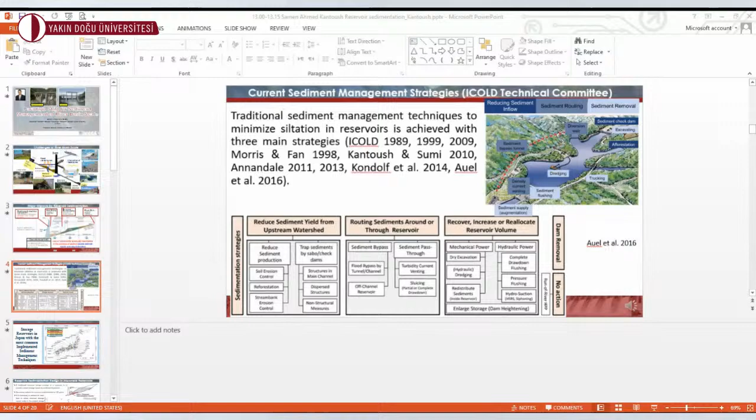We had some technical issues right now. Dr. Aliyu Ibrahim Polymeri, are you here? Hello, what did you say? Dr. Aliyu Ibrahim Polymeri, if you are ready, you can present now. Are you ready for your presentation? Okay, I am ready. Okay, doctor. You can present. Yes, I think we can see your presentation.

Hello, good day. My name is Aliyu Ibrahim. I'll be making a presentation on dairy wastewater treatment and resource recovery using electrochemical based techniques.

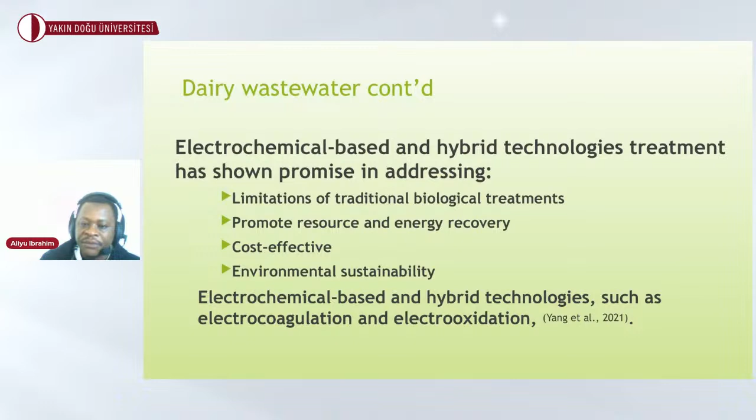So electrochemical-based methods tend to offer more to promote resource recovery. It is also cost-effective, that is, the price you spend on it is relatively cheaper. It's also environmental because usually they bring about a lesser amount of sludge. Most common processes in electrochemical-based methods include electrocoagulation, in which we produce coagulant in situ using current, and also electrooxidation, in which we produce radicals that degrade these organic components.

What are the sources of dairy wastewater? As I have said, the major source of this wastewater is dairy industries. This waste comes from heating and cooling processes, equipment cleaning, milk, product spillage, whey, and different things. Generally, the major source of this dairy wastewater is the industry, and a lot of processes happen in there. The wastewater composition varies depending on the product we are looking at.

We have different dairy products ranging from cheese, pasteurized milk, butter, ice cream. All of them have different levels of composition. Also, in addition to this, dairy wastewater could also contain cleaning agents, because whenever you carry out these things, you clean your processing plant. So you also see some of these components in the dairy wastewater. On average, it is speculated that about 2.5 to 10 liters of wastewater is generated per 1 liter of milk that is produced.

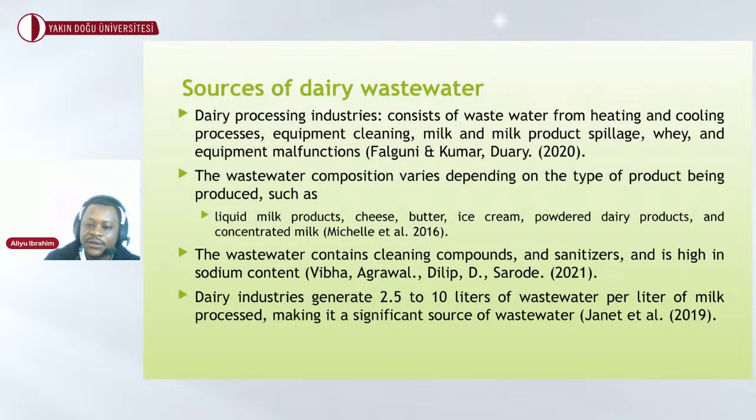Now, what do you have in this dairy wastewater? As I've said, dairy wastewater is highly heterogeneous and it varies. The composition of this dairy wastewater varies with the source and the location you're looking at. So the source, in terms of what type of water brings about this wastewater and where you are collecting it from, also affects the composition of this wastewater.

Now, a lot of indicators are used to determine how polluted the wastewater is. We use the COD, the chemical oxygen demand, and the biochemical oxygen demand to grade how polluted it is or what level of treatment has been achieved using a process to treat dairy wastewater.

Now, most often, other things that have also been looked at in dairy wastewater include nitrogenous waste, including nitrogen, total nitrogen, nitrate, ammonium, and phosphorus composition, including phosphorus and total phosphorus. All these have also been analyzed in dairy wastewater. We also have physical parameters in wastewater, including total dissolved solids, TDS, total solids, total suspended solids. All these parameters have been analyzed in dairy wastewater.

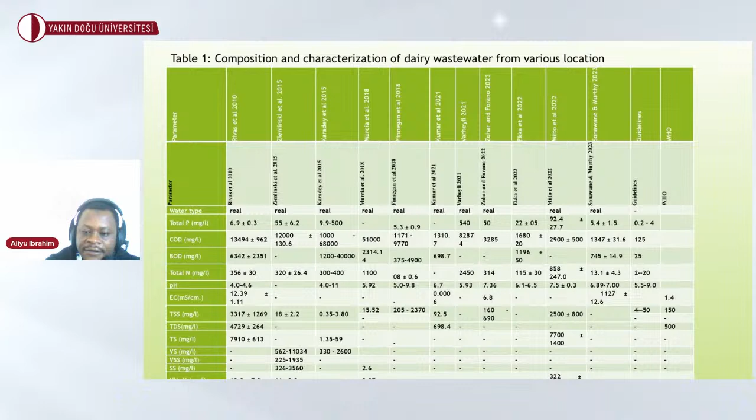So you can see, it depends on the method of processing in the industry. So it varies; high values and low values have been reported, and we have a lot of components here that have been determined in dairy wastewater, as mentioned above.

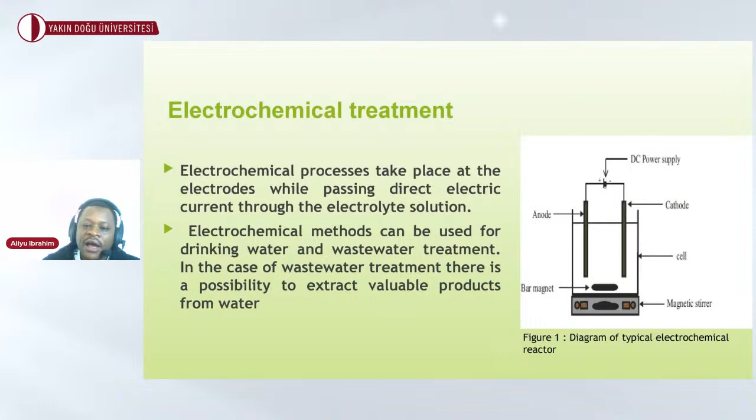Now, what is this electrochemical treatment method? What do they do? The principle is based on bringing about electro-degradation of the anode, if you're talking about electrocoagulation. But in other methods like electro-oxidation, we use current to create what we call a radical, which can further go on to break down these organic compounds.

Now, what are these electrochemical based methods? They are basically of three aspects. There is conversion, which is able to change your pollutant from one physical state to other properties, so you could change your material entirely. Then we have the separation method, in which it's able to separate your pollutant from your matrix. Then we have a combined method, which utilizes both the conversion and separation methods.

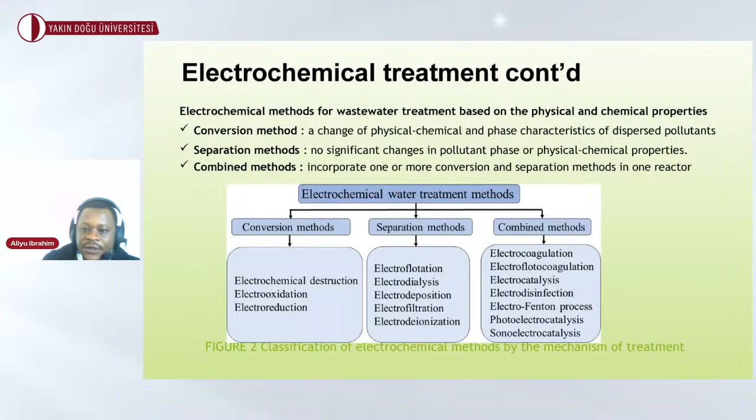Under the conversion method, we have electrochemical destruction, in which it destroys the pollutant entirely. We have electro-oxidation, in which the material is oxidized. We have electro-reduction, in which the oxidation state of the pollutant is reduced to a less toxic state. Then we have the separation method, with electrofiltration and other methods. I won't go into detail discussing these. Then we have the combined method, including electrocoagulation, electrocatalysis, and other methods.

Now, the factors that control the success of this treatment include what electrode type you are using, the distance between the electrodes, and what kind of arrangement you are adopting. The pH of the wastewater also determines the success of the treatment. How long are you treating your material? What's the temperature? All these factors affect the performance you get after the treatment.

Now, what are the advantages of this method? They are energy efficient because they are able to give you energy you can recover. You can treat quite a wide range of pollutants using this method. They are selective; you can design this method differently. We can also recover valuable resources using this method.

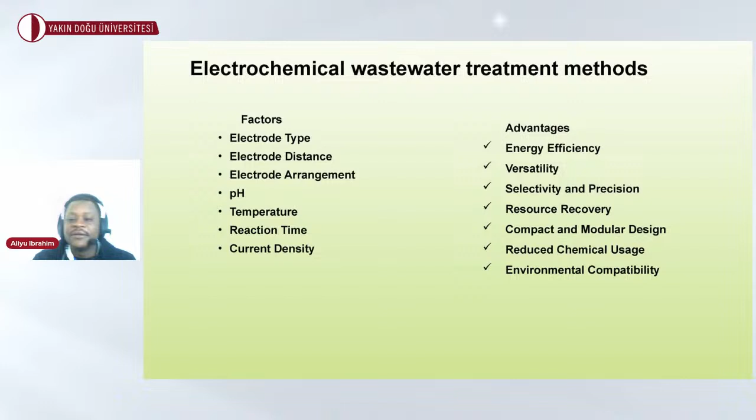They are simple, with simple instrumentation. They also reduce the use of chemicals, that is, they're environmentally compatible. That is, you don't have quite a range of chemicals used that will impact the environment.

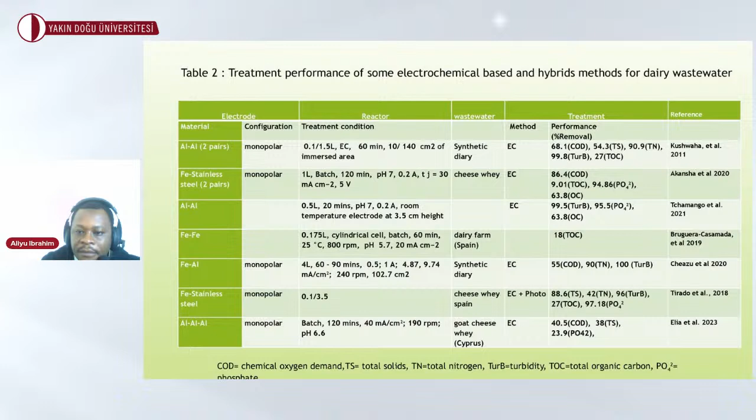Another research here, you can see these materials and analyses from quite a number of different locations. The last row gives the water that was analyzed. This is the only paper reporting the treatment of dairy wastewater in Cyprus. They used electrocoagulation to treat wastewater from goat cheese whey, and they achieved about 40.5% COD removal, 38% total solid, and 23.9% phosphate. This research was carried out in 2023, so it's quite recent. That means there's still a lot of work to be carried out, because we didn't find any data reported for North Cyprus.

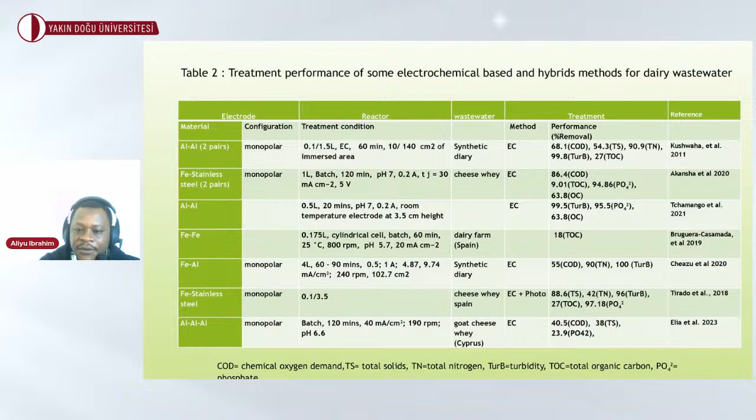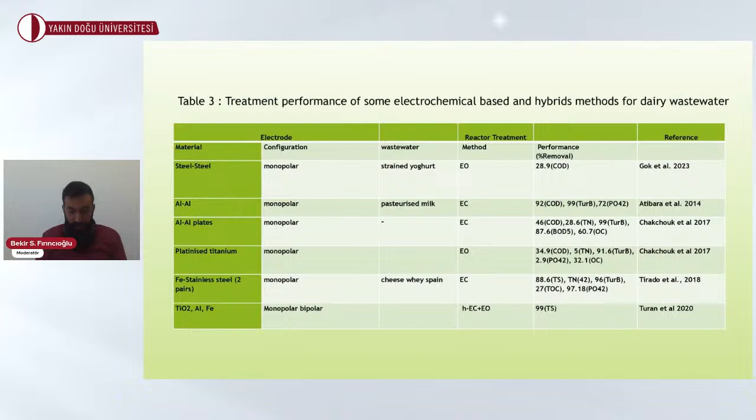Dr. Aliyu Ibrahim, I think you have some connection issue. It was perfectly all right. We were listening to you, but for the last 5 seconds, it froze. Can you hear me? Are you there? You can also use the private chat. Okay, I think we are having a connection issue with Dr. Aliyu Ibrahim. If he is available within the next minutes, he will be able to continue his presentation. Right now, Dr. Shifa Doğan has a presentation, so let her present.

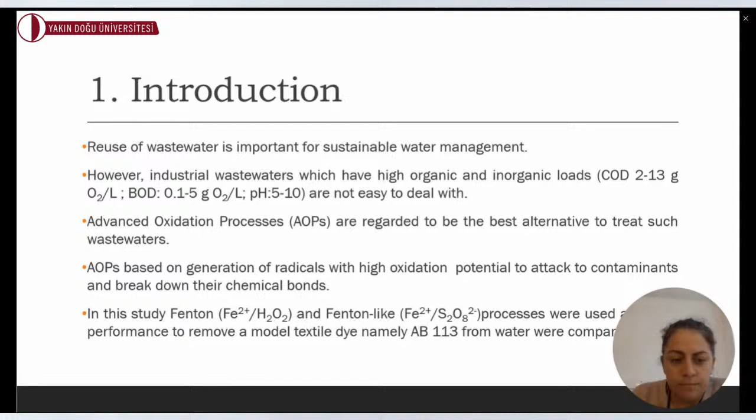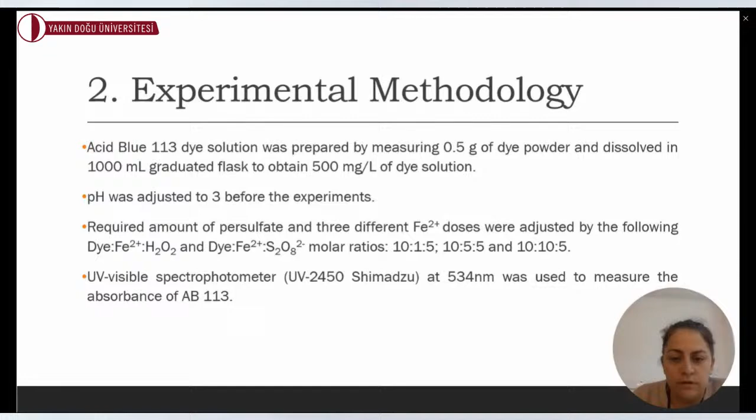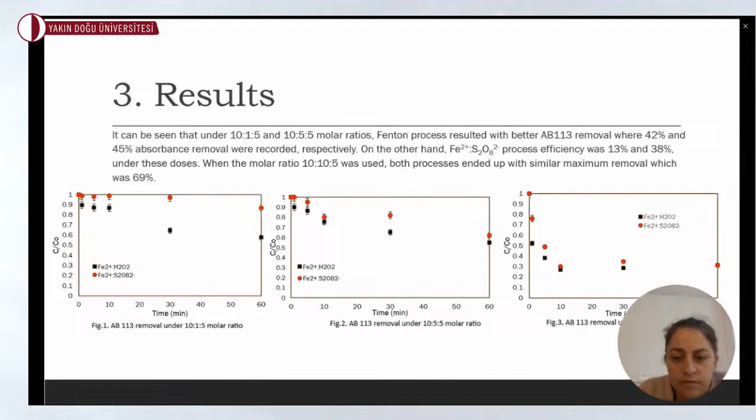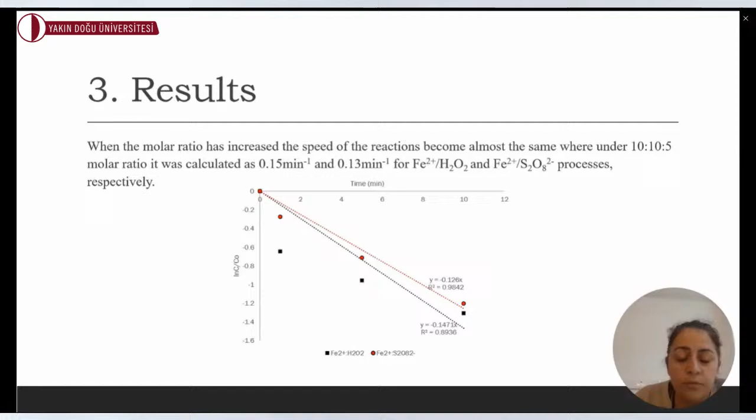So this is Dr. Shifa Doğan's presentation. Hello everyone, I'm going to present a comparative study of Fenton and Fenton-like reactions for the removal of AB113 from waters. My presentation contains... I think we have a problem with the voice. We will try to take it from the beginning. Sorry to Dr. Shifa Doğan for this.

Hello everyone, I am going to present a comparative study of Fenton and Fenton-like reactions for the removal of AB113 from waters. My presentation contains introduction, materials, methods, results and conclusion. Reuse of water is important nowadays, especially for sustainable water management. However, industrial wastewaters have high organic and inorganic loads, which are not easy to treat, such as COD ranging from 2 to 13 grams oxygen per liter, as well as BOD and high and various pH conditions.

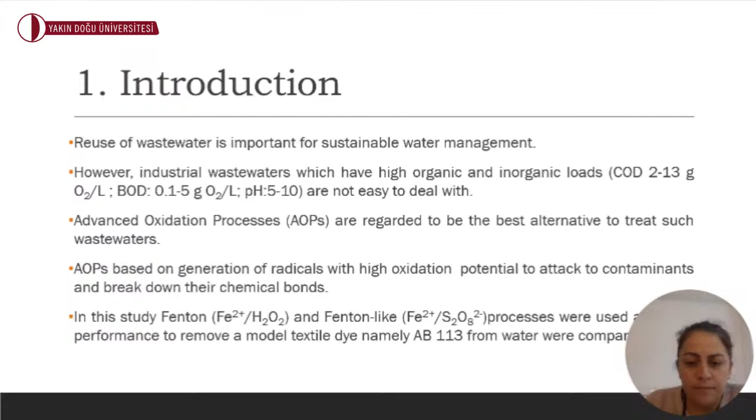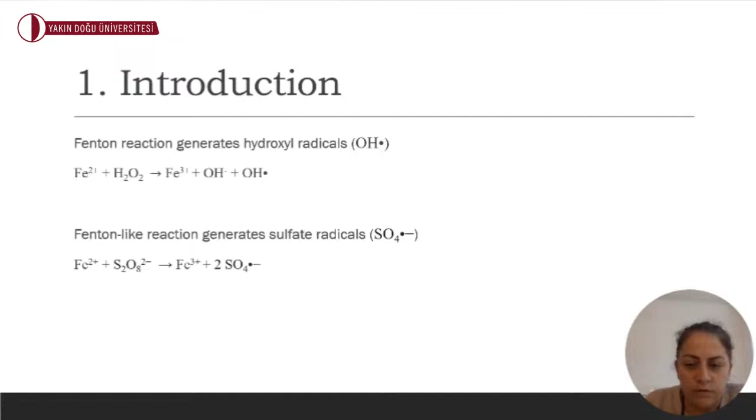The Fenton reaction is based on generation of hydroxyl radical, as you can see from the reaction pathway. Iron oxidizes hydrogen peroxide, hydrogen peroxide turns into hydroxyl radicals, and iron is oxidized. In the Fenton-like reaction, where we use persulfate, iron oxidizes and persulfate turns into sulfate radicals. So in summary, in this study we compare the efficiency of hydroxyl radicals and sulfate radicals to remove the model pollutant.

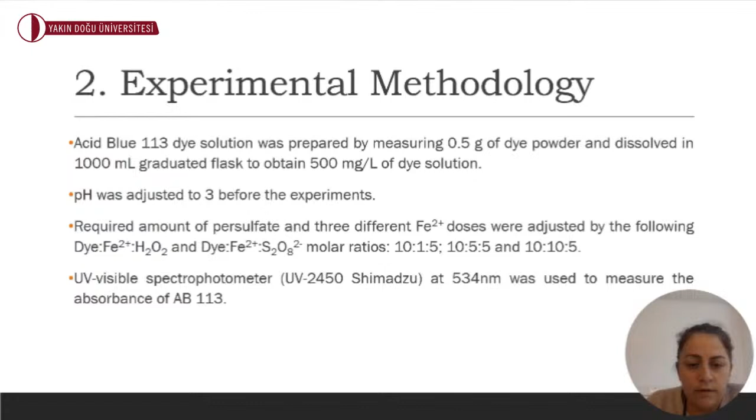In this study, 500 milligrams per liter dye concentration was used, and the pH was adjusted to 3 before all the experiments, because Fenton reactions work best in acidic conditions. The dye:iron:hydrogen peroxide or dye:iron:persulfate molar ratios were 10-1-5, 10-5-5, and 10-10-5; these are the most studied ratios in the literature, and we chose to start with them. The absorbance removal was recorded by UV-visible spectrophotometer at 534 nanometers.

In the results, we observed that under low molar ratios, the Fenton reactions gave better results, and 42% and 45% absorbance removal were recorded under 10-1-5 and 10-5-5 molar ratios with Fenton. On the other hand, the Fenton-like reaction resulted in lower absorbance removal, which was 13% and 38% respectively.

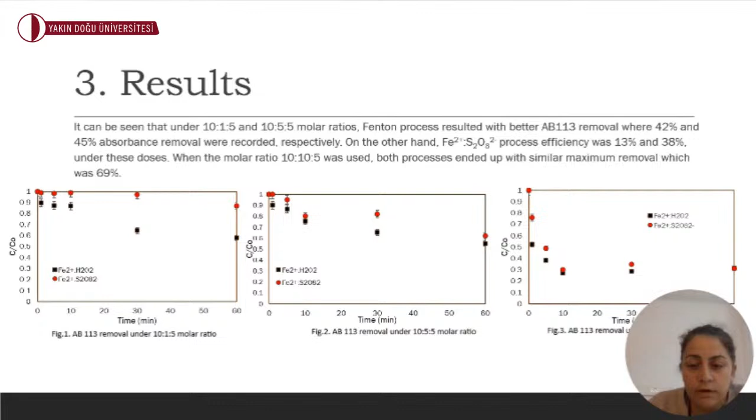In contrast, when the dose was increased to 10-10-5, the Fenton and Fenton-like reactions became comparable, and a similar removal percentage after 60-minute treatment was observed, which was 69%. And the degradation curves follow first-order kinetics, and it enables us to do some

The observed removal rate constants enable us to compare the performances of the two reactions. And here we can see that the Fenton reaction is much faster than the Fenton-like reaction, found to be 5 times faster. The observed reaction rate constant was 0.01 per minute for the Fenton reaction, and on the other hand, for the Fenton-like

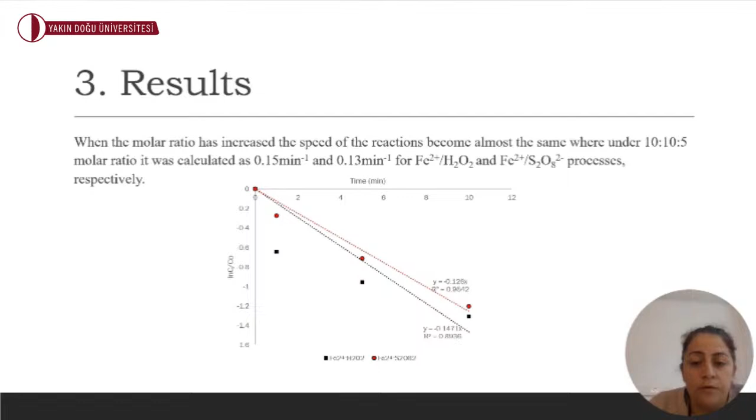reaction, it was 0.002. And for the higher dose, as the removal percentage became similar, the removal rate also became similar. We can see this in the observed reaction rate constants, which were close to each other, 0.15 and 0.13 per minute for the Fenton and Fenton-like reactions, respectively.

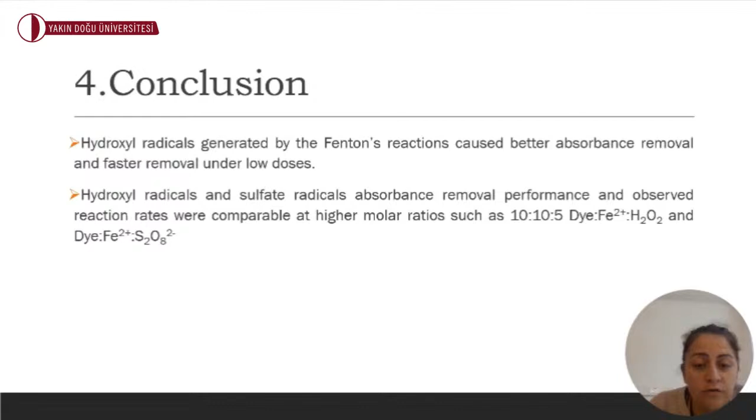In summary, for the conclusion of this research, hydroxyl radicals generated by Fenton's reaction cause better absorbance removal and faster removal for the lower doses we have tested in the scope of this study. And when the molar ratio increased to 10-10-5, the performance of hydroxyl radicals and sulfate radicals to remove AB113 was comparable, and the reaction rates were comparable too.

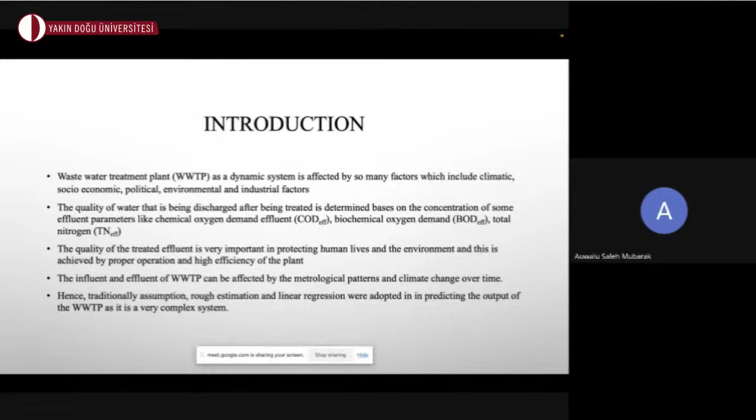So traditionally, assumptions and rough estimation, along with the statistical method of linear regression, were adopted in the prediction of these outputs in wastewater treatment plants. So the aim of the study is to predict the chemical oxygen demand in the new Nicosia wastewater treatment plant by achieving the following objectives.

One, we need to have data selection, and we need to process the data in such a way that it will give good performance or good features to the model when training. We also need to choose the machine learning models that we want to use in the prediction of the COD. And we will explain how the models make decisions using the SHAP explainer.

So artificial intelligence is like mimicking human intelligence, using statistics, algorithms, and so on. Under artificial intelligence, we have machine learning and deep learning, and also a new study area, explainable AI, which gives humans trust in how the models make decisions and which parameters contributed a lot to the prediction or decision making of that particular model.

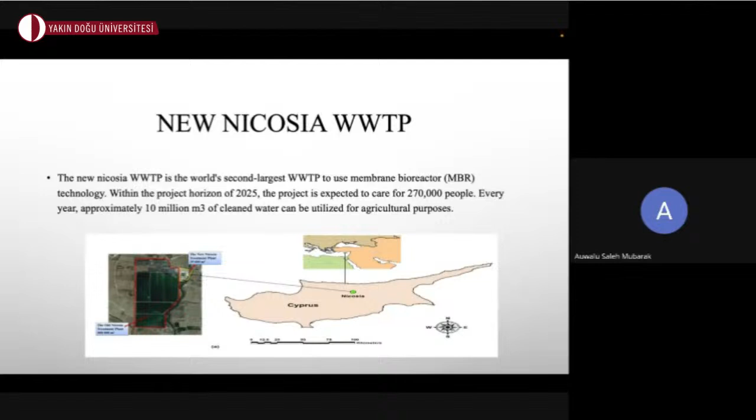So the new Nicosia wastewater treatment plant is a bicommunal wastewater treatment plant. The project horizon is up to 2025 and it is expected to take care of 270,000 people. And it will be discharging 10 million cubic meters of clean water that can be utilized for agricultural purposes.

So for the data set we are going to use, one is from the wastewater treatment plant, which we label as C1, and also the temperature data from NASA, which is the meteorological data. This data will be split into 75% for training, and the remaining 25% will be used for validation. The input and output data will be normalized into a range of 0 and 1.

So the models that we chose to use in this study are ensemble models, which are gradient boosting, categorical boosting, and random forest. These models are based on decision trees and random forest, so they are good ensemble models.

So in the methodology, we have the data pre-processing, which is the normalization to make the values in the range of zeros and ones. Then the training using the Nicosia wastewater treatment plant data, which we label as C1. The training using the meteorological data, which we label as C2. And then the training using the hybrid data, which is C1 and C2. Then the model explanation uses the Shapley additive explanations, which is SHAP.

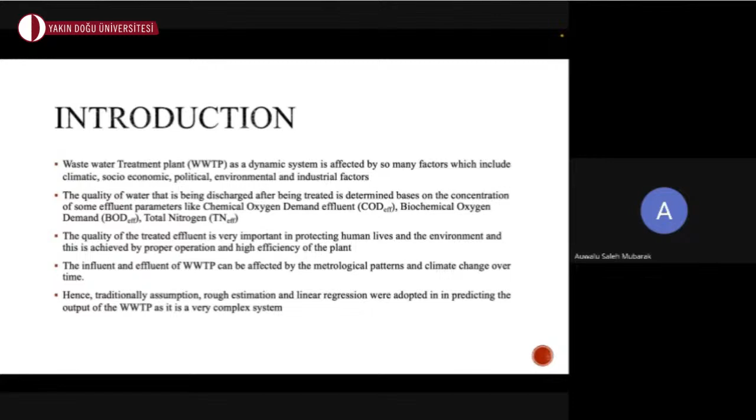So in this study, we'll try to use artificial intelligence or machine learning models, unlike previously when traditional assumptions, rough estimations, or classical models such as linear regression were adopted. So the aim of the study is to predict the biochemical oxygen demand in the new Nicosia wastewater treatment plant. We are going to achieve this aim by good selection of the parameters or variables from the data, the selection of the machine learning models, and also improving the performance of the models by applying an ensemble technique.

So we all know that artificial intelligence is all about mimicking human intelligence. So we are going to employ these models to see how they take in the data and make predictions of this particular biochemical oxygen demand. The new Nicosia wastewater treatment plant, located in Cyprus, is one of the largest in the world, and it uses a membrane bioreactor, which is a good technology for wastewater treatment. The plant is expected to provide the island with clean water and also water that will be used for agricultural purposes.

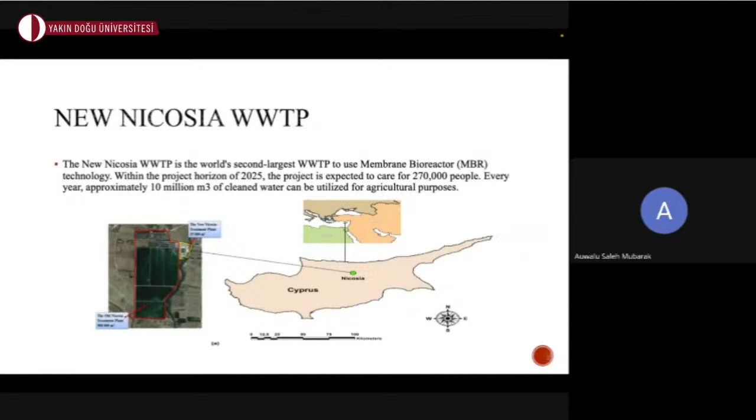So in this study, we are going to use two data sets. One, which is the data from the wastewater treatment plant, and also the meteorological data from NASA. So we'll have different input variables such as the total nitrogen, phosphorus, pH, the conductivity as the inputs, and also the effluent, which will be the biochemical oxygen demand or the BOD. So for the NASA data set, we have the relative humidity, the temperatures, and the maximum temperature, which are on daily

readings. And also we'll separate the data into training and testing, which will use 75% for training, while the remaining validation will be 25%. The validation set will not be used for training, it will only be used for the testing. And also we'll try to normalize the data in such a way that we'll keep the data in the range of 0 and 1.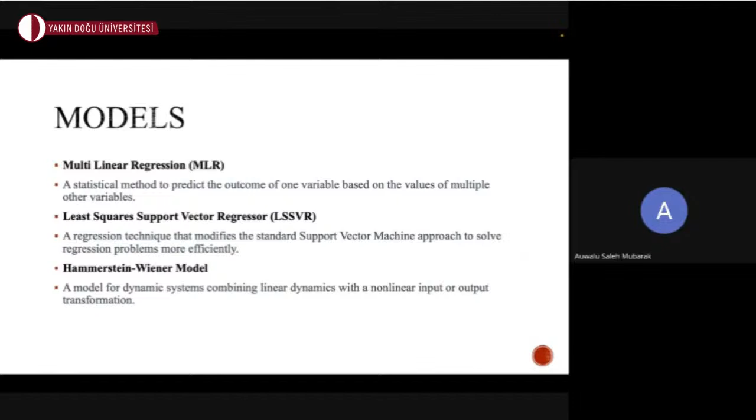So the models that we are going to employ today is the multilinear regression, which is a statistical method of predicting the outcome of one variable based on the values of multiple other variables. And then the least square support vector regressor, which is a regression technique that modifies the standard support vector machines approach to solve regression problems more efficiently. And also a Hammerstein-Wiener, a model for dynamic system combining linear dynamics with non-linear inputs and/or outputs transformation.

So for the ensemble, we use the feed-forward backpropagation neural network. So this neural network has the forward and the backward error propagation in order to minimize the error of the particular network or ANN. So in this, we have the data preprocessing, whereby we'll normalize the data to the range of zero and one for both the input and the target.

And also we'll train using the wastewater treatment plant data. Also we use the meteorological data as well to train the standalone models. And also we'll make a hybrid use of the wastewater treatment plant data and the meteorological data in order to improve the performance of the prediction of the BOD.

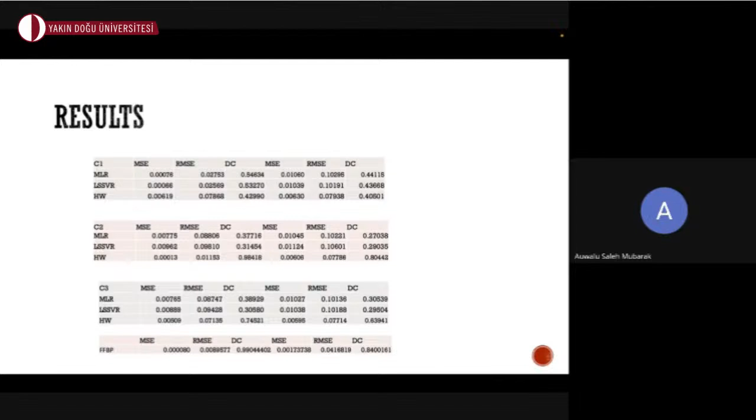So in this, we show that we can use different data sets in terms of predicting the biochemical oxygen demand. And this shows that all these parameters that we use can affect the levels of the effluent or the BOD that we are trying to predict. And also we compared the performance of the models in the prediction of the biological oxygen demand, and also the effect of the ensemble model, whereby it improves the overall performance of the model. This is the end of my presentation.